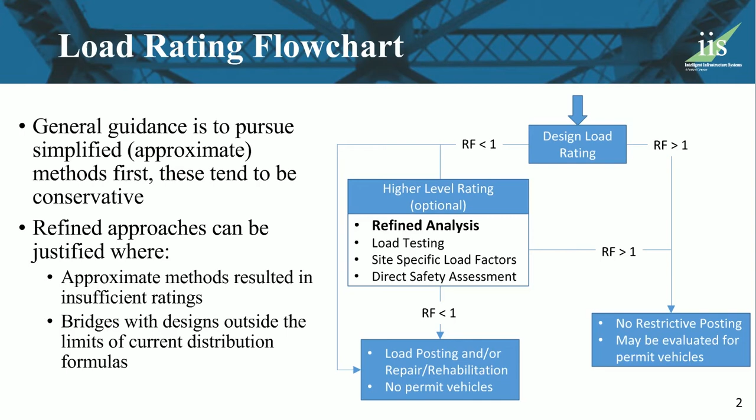So I wanted to get into the differences between an approximate and a refined analysis. So in each approach, your rating factor equation is the same: capacity minus dead load divided by live load, where the capacity minus dead load, you can kind of think of it as a reserve capacity, or what's left to resist live load. And in each method, approximate and refined, the capacity is the same. It's your code-based capacities for various limit states based on the material properties and the configuration.

In an approximate analysis, your dead load is really just engineering judgment. A decision has to be made about the self-weight of various components and which members it applies to. And your live load is the AASHTO distribution factor multiplied by the vehicle-induced loading. So in a refined analysis, those two demands are what's different.

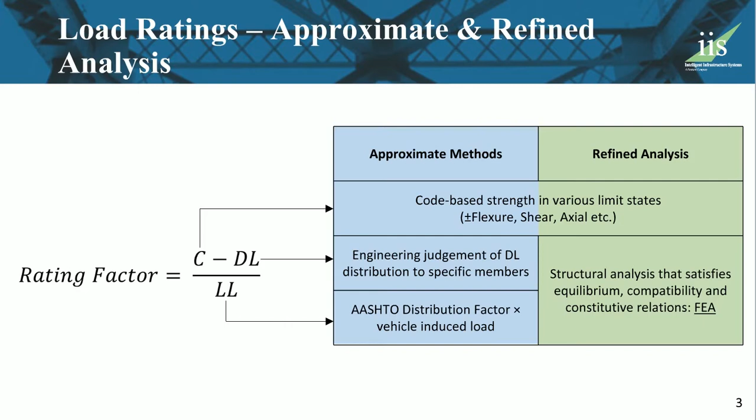In a refined analysis, the demands are based on a structural analysis that takes into account the actual configuration and the actual stiffness of the members. And there's a lot of different analysis approaches that qualify as a refined analysis, but for our purposes here, I'm really just going to be talking about finite element analyses, so FEA.

So let's talk about the workflow of a refined analysis. You have a structure, a bridge. You probably have an inspection report and hopefully a drawing set to go along with this bridge. And you need a refined analysis, so an analysis model, FEA model, and a set of results.

Then sit down in front of an FEA program and click through the user interface to build the model, to run the analyses, and to extract the results that you need. And in my experience, that process has been a little bit tedious, it can be error prone, and it's difficult to reproduce, but it doesn't have to be. And that's the automation I want to focus on here, is basically improving that workflow.

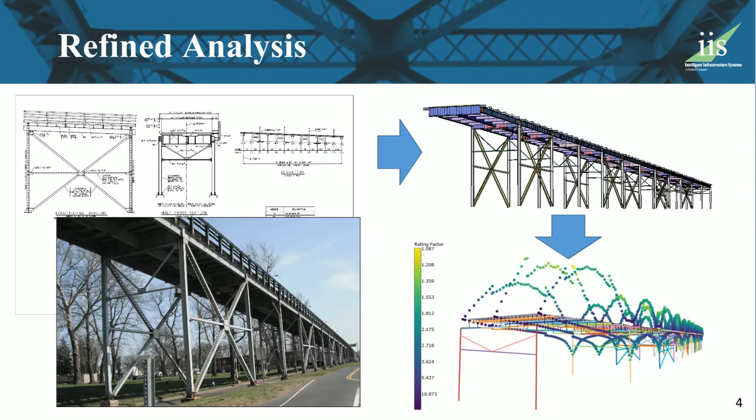So we could look at the steps of a refined analysis, and I see it as three kind of obvious steps. There's building the model, analyzing the dead load and live load cases, and then extracting member demands. And I'll get to the rating calculations later.

But if we want to look at these steps, when you build the model, it's really conceptualizing the structure, understanding the load paths, and then making a decision about how you're going to represent those elements in the model, deciding on element type, connectivity, mesh size, how you're going to represent a wearing surface or curbs or barriers, how you're going to apply vehicle load, that sort of thing.

Once those decisions are made, then you could interact with the finite element program to build the model. Then you submit the analysis, basically let the computer churn and pull out the results that you need. But in this process, what I really want to focus on here are the decisions.

So if I look at just what I'll call the engineering input, the decisions that need to be made, they're all up front. Your conceptualization of the structure, your decision about element types to use, mesh size, how to connect things, how to apply loading, they could all be made right at the beginning of the process. And that kind of condenses the engineering effort.

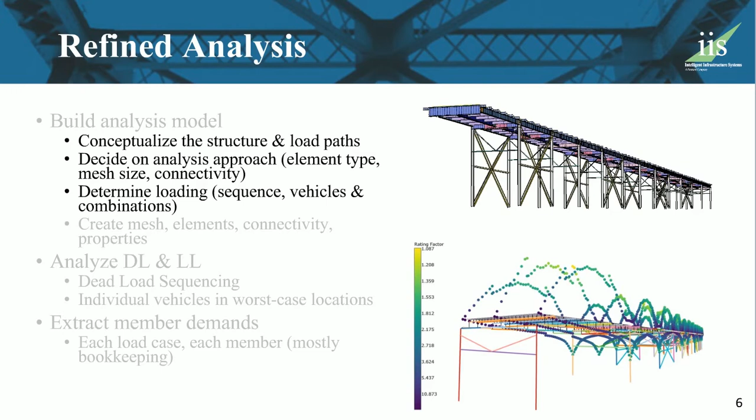So starting at the top, we basically have our known bridge documentation, and we make a couple of engineering judgment decisions that define our conceptualization of the structure. So then we have basically two categories of information. You have the stiffness and mass information that will go directly into the model, and you have your strength information that is still needed for the rating inputs. So something like your material, like a steel yield strength or an unbraced length, that sort of thing.

So all of those inputs then get packaged into one input file and passed into an automated process that, in theory, then just carries out your instructions. So it will build the model, analyze the model, extract results, hand you an output file that's a set of demands. It could even compute ratings internally and spit out your load ratings. So this is kind of the big picture view for what an automation routine could be.

But in order to improve on the normal workflow, it doesn't have to be this complex or this comprehensive. Even a small part of this process could be automated, and anything that kind of removes clicking through an interface and replaces that process of interacting with the GUI with a documented and traceable and repeatable procedure is definitely going to be beneficial. So the goal here is really to minimize that clicking through an interface.

And software companies, they know this. They're aware of this approach, and they're really making it easier for their users to do this kind of thing. Whether they call it an API or a macro, there's almost always tools available to give you access to the FEA program's commands without directly needing to manipulate the user interface.

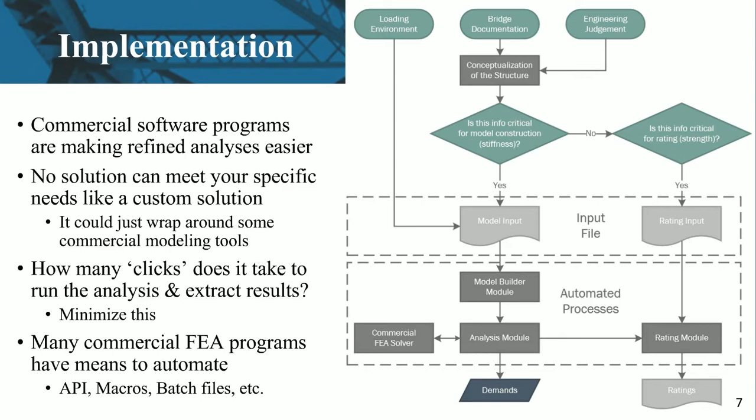So what I want to talk about today is my implementation of an automation approach. And the automated process I show on the flowchart there, I group into three chunks. The first is building the model. FEA programs in general are getting very good at helping you to build a model. They either come with predefined templates or a guided interface or a modeling wizard. There's tools with these programs to make it easy to build a model. So I'm not really going to focus there.

And then the green box where I talk about ratings, the load rating calculations that use your model results, they need to happen whether or not your process is automated. So there's not a huge challenge in automating the actual rating calculations. Where I want to focus on today is automating the analysis and the results extraction. In my experience, that's where I've seen the most problems and the most time spent manipulating the GUI, the user interface of these programs.

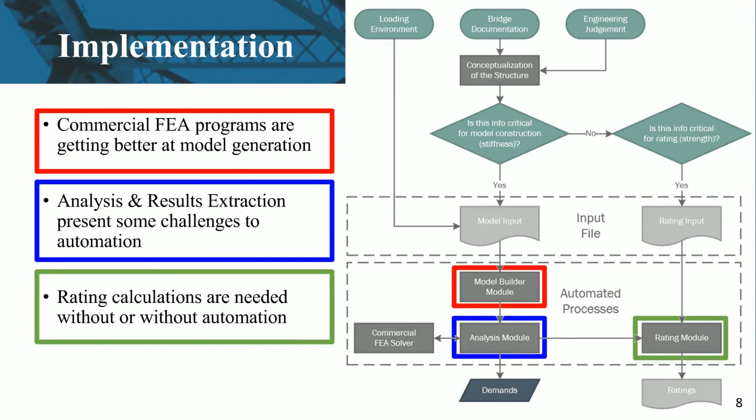So the first thing I'm going to touch upon here is composite member demands. And I think this is a pretty common problem. As soon as a model is refined to the point where you now have multiple elements representing a single component, it becomes more difficult to interpret your results.

So if you want a composite girder moment out of a model that modeled that girder with a beam element and then shell elements representing your deck, you really need to consider the moment contribution of the axial force couple between the two, the contribution from the beam element representing the girder, and the contribution from the shell elements representing the deck. And that process is tedious, and to try to do that basically by hand using outputs from each element is time-consuming, and it's difficult, but it really lends itself to automation because it's repeatable.

So once a routine has been developed to compute this net section moment, you could repeat it for each load case for each location of interest. And that is a huge improvement on efficiency.

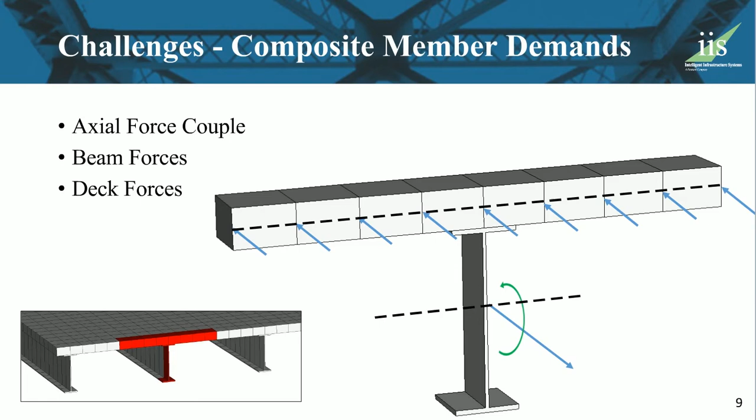So there is a workaround for this specific problem, but it requires a couple of assumptions. If you can assume that the net axial force in this cross-section is 0, and you're okay neglecting the deck element contributions, you could use the girder beam element axial force directly multiplied by the distance between the centroids to estimate your moment. But again, it requires a handful of assumptions, and the engineer performing the load rating really needs to be okay with those assumptions in order to use that approach.

The next challenge I want to talk about is a choice of a live load solver. So I think there's really two obvious choices for running your live loads, either a quasi-static approach or an influence surface approach. And the quasi-static, you can think of it basically like moving the truck or the vehicle along the bridge in predetermined steps with the goal of putting the vehicle everywhere it could possibly be on the bridge.

Once you have each of those individual locations analyzed, you could take the envelope of results, and within that envelope, you'll find the worst case for any location on the bridge. So depending on the size of the structure, this could be a really long analysis time. The alternative here is an influence surface approach, where you choose an output quantity to minimize or maximize, and then solve for the vehicle location that minimizes or maximizes that specific output quantity.

So the drawback here is you really need to know ahead of time what your governing location is going to be, or you need to select a lot of potential locations, and again, the number of analysis cases can get very high. But an additional complication here is that when your output quantity that you're choosing to minimize or maximize is something like a composite moment, an FEA program may or may not be able to select a compound output, something that's a function of multiple elements, as the quantity to maximize. So again, either of these approaches really requires some thought, and it's up to the engineer to decide which to use.

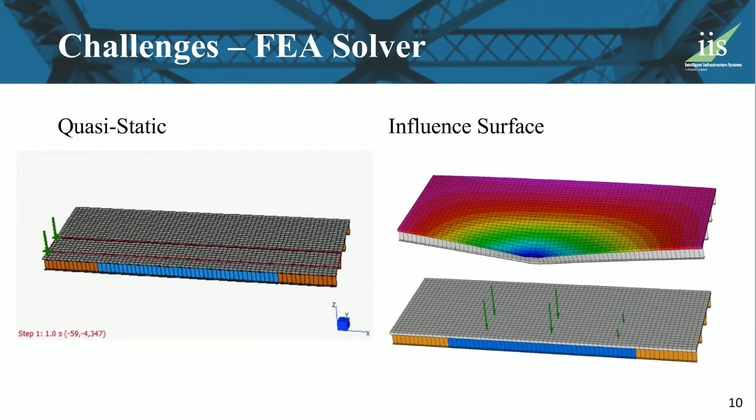And the last challenge I want to talk about with analysis here is how to handle construction sequencing. So for a composite multi-girder bridge, the same model, you really want to represent your non-composite dead load, your long-term composite dead load, and the short-term composite live load. And that can be sort of difficult because it's essentially a different stiffness that needs to be represented in each of those cases. So most commercial FEA programs allow you to modify stiffness as a function of some other parameter, either a direct modification or maybe a function of time or temperature.

But essentially what you can do is modify your deck stiffness. So in a non-composite case, the deck has no stiffness, and in a long-term composite case, it has a portion of the stiffness. And in the short-term composite or the composite live load case, it has its full stiffness. And what I found is that in addition to that, it's really helpful to represent the dead loads as loads rather than through element densities.

So take, for example, a wearing surface. The self-weight or the dead load of your wearing surface requires a different load factor. So you really need to represent that in its own load case. And I think having your dead loads applied as loads rather than as element densities in multiple load cases really gives you a finer resolution, a finer control over your dead loads.

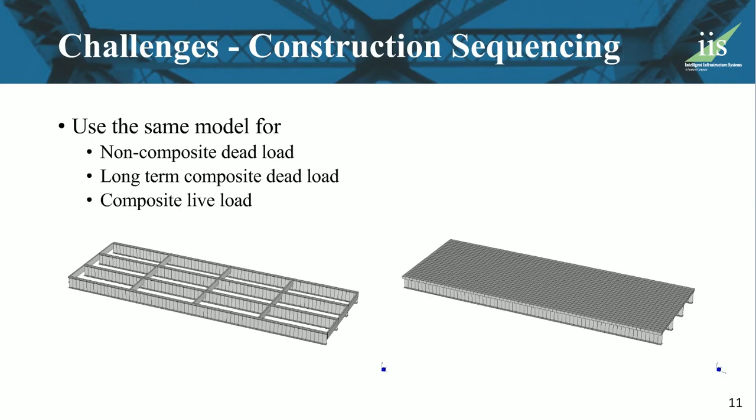So now that we've gone through a couple of the challenges, what I want to get into are really the benefits. And I think I already mentioned that the benefits of a refined analysis are a more accurate representation of your structure and typically a lower live load. But what I really wanted to focus on here are the benefits of automating the process.

So I need to say the benefits of automation are a little bit dependent on the flexibility of the automation routine. So all of the model images on this slide and all of the model images you see in this presentation were all created with the same automated routine to build a multi-girder model. And there's a bit of a trade-off here between the complexity of the routine and how easy it is to develop. But the more generalized it could be, the more applicable it's going to be. If your program is more general, it'll apply to a lot more structures.

So with that said, I think the big benefits of the automation routine are efficiency, transparency, and repeatability. And I want to talk about these a little bit more. First, efficiency. Being able to condense the engineering effort right up front and not have to spend time clicking through an interface to build a model. It's just a better use of the engineer's time.

When I say transparency, what I'm really meaning there is the process is traceable. So take, for example, if two engineers are each performing a refined load rating using a manual process where they each sit down and build a model using a GUI, they're going to get different results. And when they try to compare, it's not going to be obvious how those two analyses are different. They're going to have to do some digging into element choices, how each member was represented, how they were connected, how dead load and live load were represented. It's going to be a significant effort.

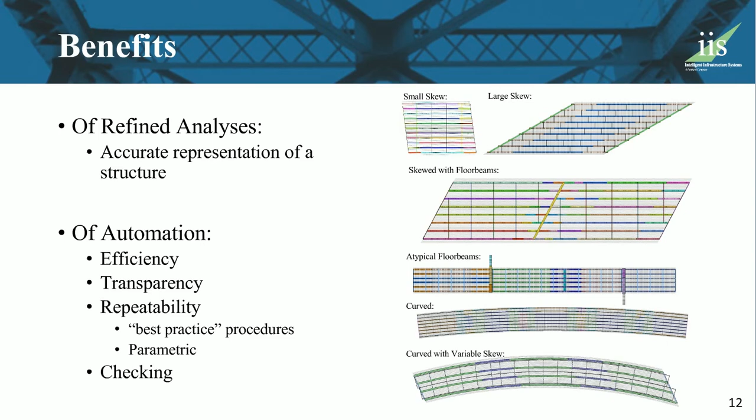So I think the best way to really appreciate the benefits of this automation routine is with a quick example. Up until this point, I've been speaking in generalities, advocating for more refined analysis and more automation in refined analyses. From here forward, I'm going to talk about the automated routine that I developed to improve the workflow, with a simple example. In the next 10, 15 minutes, I want to go through the first illustrative example from MBE. This is a really simple bridge that has a single line girder rating in MBE. So I want to do a refined analysis of this bridge, and then I can compare.

And in the process, we'll be able to see the workflow of using an automated refined routine. So this bridge is a simple structure. It's 4 composite girders and a concrete deck. So I think step 1 is conceptualizing the structure. It's a fairly easy structure to understand, and that kind of makes it easier on us now. But it also saves time in this quick demo.

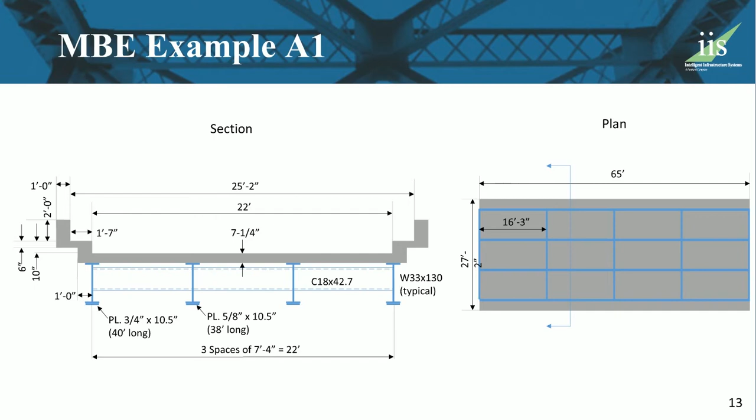So I'm going to choose to model the deck with shell elements, the girders and diaphragms with beam elements, and I'm going to choose to neglect the curbs and barriers, basically treat those as non-structural mass. So the first step in defining your set of inputs for an automated routine is locating the origin. And now all of my coordinate inputs are going to be based on this location.

So you see the location I selected here, where the x-axis is along the length of the bridge, y-axis is across the width, and z is vertical. And my origin is in the center of the deck, so the z-coordinate of my deck shells will be 0. And the y-coordinate of 0 represents the center line of the bridge. And that allows me to check symmetry on the girder inputs, basically by saying I have the same plus or minus y coordinate.

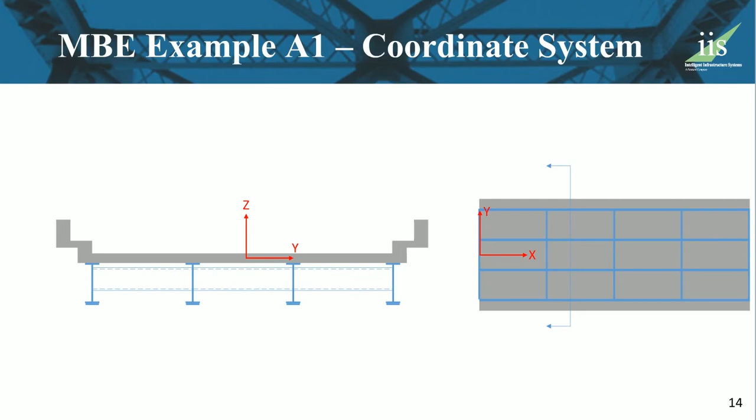So the first thing I'm going to do here is start defining components. And in the next handful of slides, I'm going to be defining components, and there's going to be a yellow box on the bottom. And I know the text is small in there. The purpose of that box is really to show the amount of input that I need in order to define this component. I don't intend for you to read and understand everything in the box.

So take, for example, the deck. I've grouped my deck into 3 different deck regions, 1 in the middle and 1 under either barrier. And the reason for that is just to assign non-structural mass to the deck regions under the barriers. So that's the only difference between my 3 different deck regions. So you see here, I'm basically just locating the 3 different regions, assigning a thickness and non-structural mass inputs. And then the automation routine will take care of meshing these with shell elements, connecting them to one another.

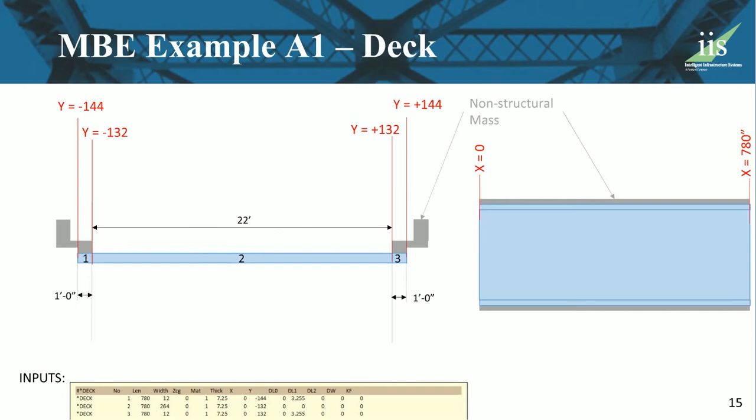The next component I want to define are girders. So there's 4 girders. Each one has a bottom cover plate. So my input then, I'm treating them as 12 separate girders. So this input syntax is entirely something I made up. And it works for me because it's general.

I think you could very easily define the inputs here in a more condensed format, but you do that at the cost of some generality. So I found this format to be really useful to define a wide variety of structures. And I think defining 12 lines of input to define these 4 girders is not that bad. So that's the method I chose here.

So here I define my girder components, basically the start and stop locations, the material properties. I locate it vertically by defining a haunch. I define the connection to the deck with a connection property. I'm defining it here as composite, so I'll use a rigid link to connect them. And then I also provide some information needed for the ratings. So unbraced length, whether or not the web has transverse stiffeners, whether or not the web is coped, that sort of thing.

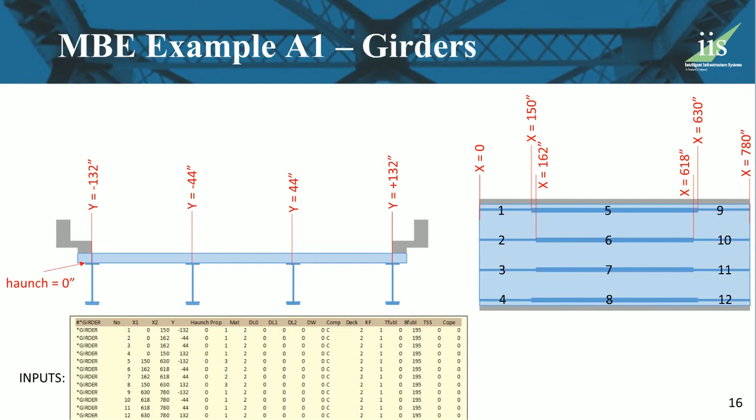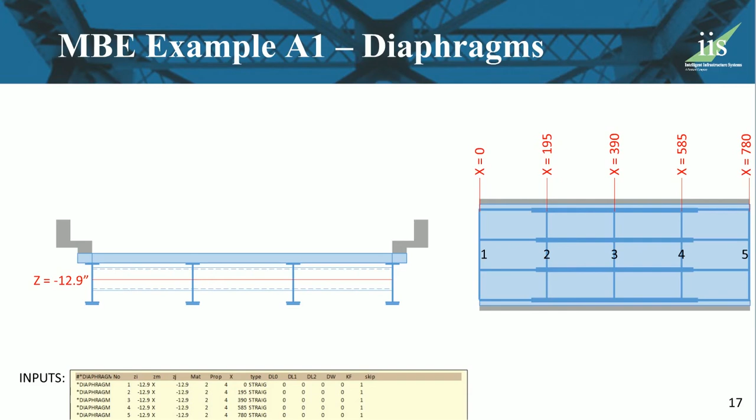So onto the diaphragms, again, the same idea as the girders. I'm identifying components, I'm locating them, I'm giving them a cross-section property designation, and the automation routine will take care of putting these elements in the model and connecting them to the rest of the components.

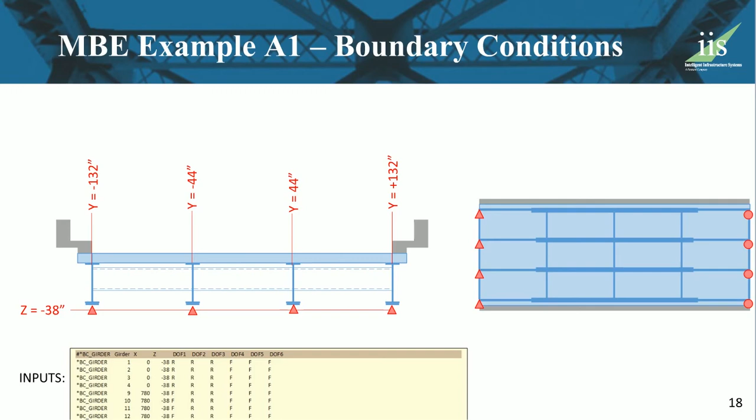Next is boundary conditions. So here I'm putting a pin and a roller on the end of each girder and designating which degrees of freedom I want to restrain, and the automation routine will take care of actually figuring out which node is there and assigning it to the node.

Material properties and cross-section properties, this one is pretty straightforward. It's really just a matter of defining the linear elastic properties of the concrete and the steel. And again, I'm adding in the strength information. That'll get used for the rating calculations, not necessarily in the model.

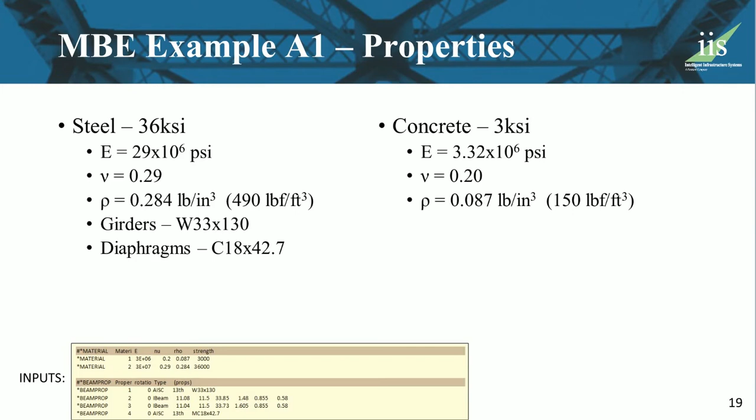And then finally, loading. So for this example, I'm going to choose to run a quasi-static live load. So I'm locating the lanes where I want to put the vehicles. And according to MBE, I want to keep a 2-foot spacing between the edge of a curb and the vehicle point loads, and I want to keep a 4-foot spacing between passing vehicles in adjacent lanes. So essentially I get 7 feet left to place my vehicles.

And I'm going to run just one vehicle here, the HL93 Tandem. And again, that's just in the interest of time. And the other thing I'm defining here is the analysis step. So how far do I want to move the vehicle in each increment? And that's my decision. I could choose to take very large steps and the analysis will go pretty quickly. I could take pretty small steps and the analysis will take quite a long time.

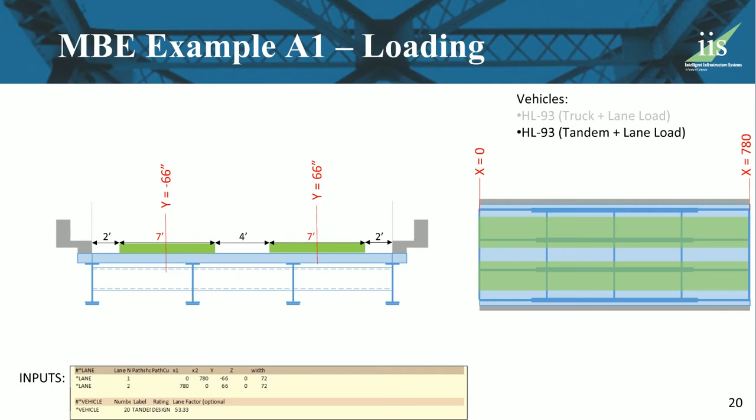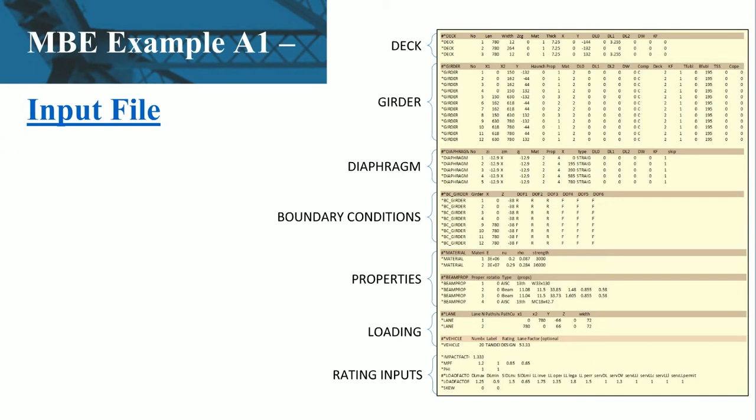But the difference is going to be the resolution on my load envelope. And in this example, I'm going to go in relatively large steps just so the analysis runs fairly quickly. And that's it. That's all the inputs I need to define the analysis of this structure. So there's a few new lines at the end. These are inputs needed for rating, so like a load factor, impact factor, multiple presence factor, phi factor, that kind of thing. But that's it. This is the entire input file.

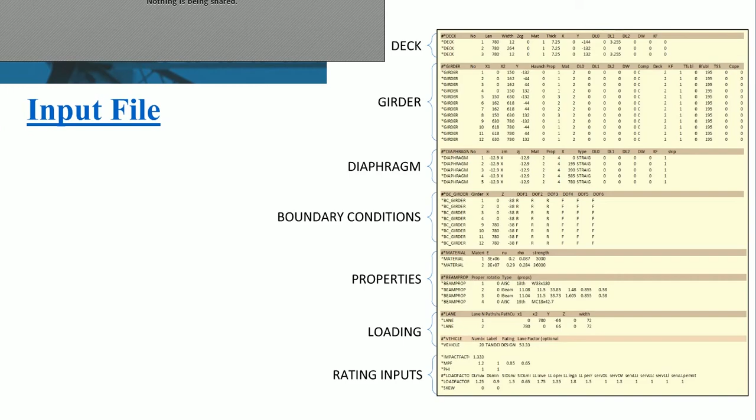So at this point, I want to basically show how this input file then gets used in an automation routine. So Lubin, if you could jump over to the screen recording. So what I'm going to show here is a recording of my screen that I did. This was a week or two ago. And you should all be seeing Lubin's screen now. He's going to play the presentation.

But what we're going to see is on the left, it'll be a Windows Explorer menu. And on the right will be a command prompt. So the automation routine I developed, it's written in Python, and it's what's called a CLI, or a command line interface. And that Python code manipulates and accesses the features of the commercial FEA program called Strand7. Explorer on the left, and my automation routine, the command line on the right. I refer to it as BridgeMiser. That's just the name I gave to my automation routine.

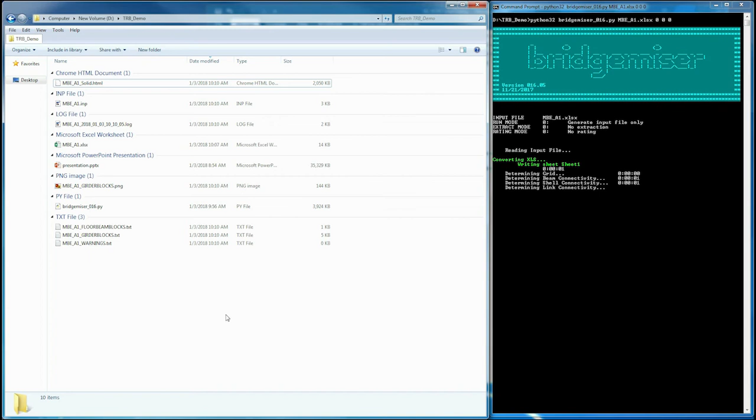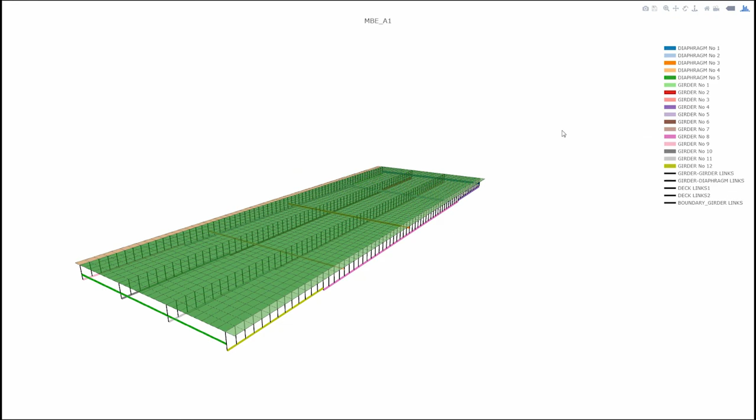And what I'm going to do is basically pass in the Excel file that we just developed as my input file. It's my set of instructions. And what the code has just done is taken those instructions and built the analysis model. So initially, I don't want to do the entire rating. I just want to build the model. So that's what we're looking at here. The model is built. All my components are now defined as elements. The little black lines are links connecting the girders to the deck. And I basically can confirm that the model built exactly what I wanted it to do.

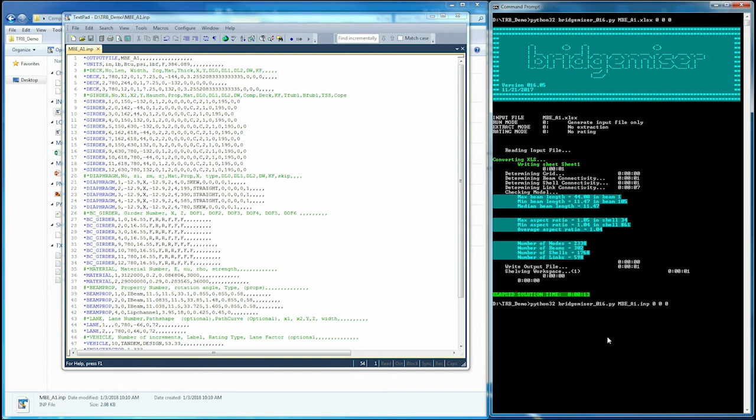So if you allow me a quick tangent, I'm going to go into my input file, the text version this time, not the Excel version, and make 2 quick changes. So like I said before, this process is now parametric. So the changes I made are I added a skew to the bridge, and I changed the way I want to represent the girders. So I made 2 quick changes, and I resubmitted that input file into the BridgeMiser routine. And as a result, it will then generate a new model. So the new model is going to represent girders with beam elements for the flanges and shell elements for the web. You see it did some internal checks there and gave me some information about my model.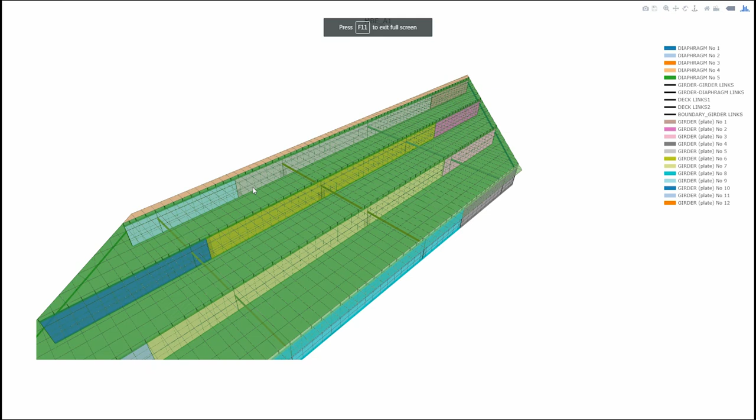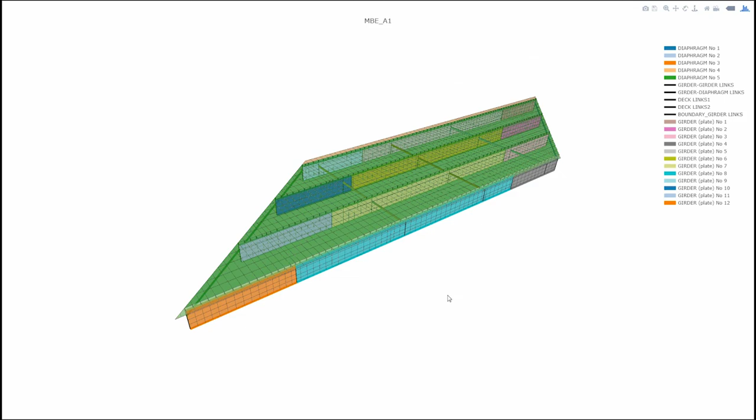But now I'm going to open up the rendering again, and I can see the new model is now skewed. So the mesh is totally different, elements are totally different, and the connectivity is totally different, but it's the same structure. All I did was add a skew and change the way I'm representing the girders. So that's what I mean when the model is now parametric. So in order to build this model by hand, it's a significant undertaking. But once you have the input developed, modifying it to make a slightly different analysis is really not a problem at all.

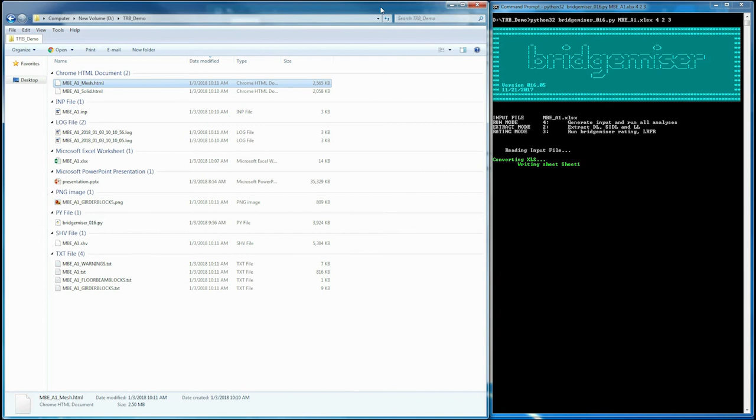So now I'm going to go back to my original model, the one without the skew, and I'm going to submit the entire analysis. So I want to build the model, I want to run my dead loads, I want to run my live loads, extract results, and compute ratings. And as I mentioned before, I was able to include some self-checking into the process. And one self-check procedure that I always do is running a modal analysis.

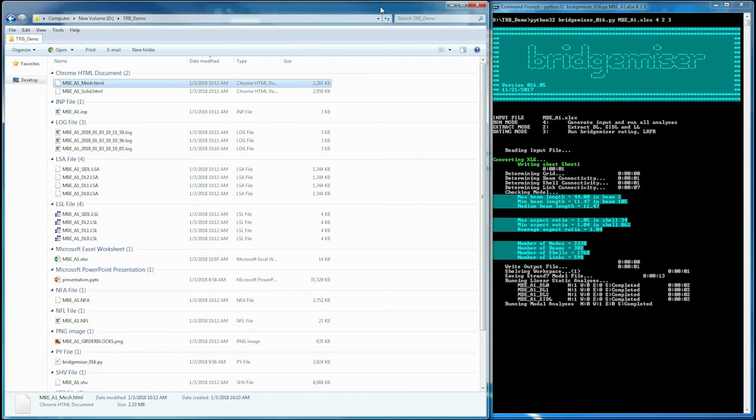So you see here on the right in the command line, as it steps through the process, it basically gives a printout of what it's currently doing. So after running the linear static analyses, it'll run a modal analysis, and then I'll open up that same viewer window again to allow me to view my modal analysis. It'll show me my mode shapes, and I can basically confirm that there's no errors in connectivity, that my properties are reasonable, and the mode shapes are reasonable.

So in the background now, the automation routine is continuing to run. It's running the live loads. It's going to start extracting results. But while that's running, we're going to look at the mode shapes here.

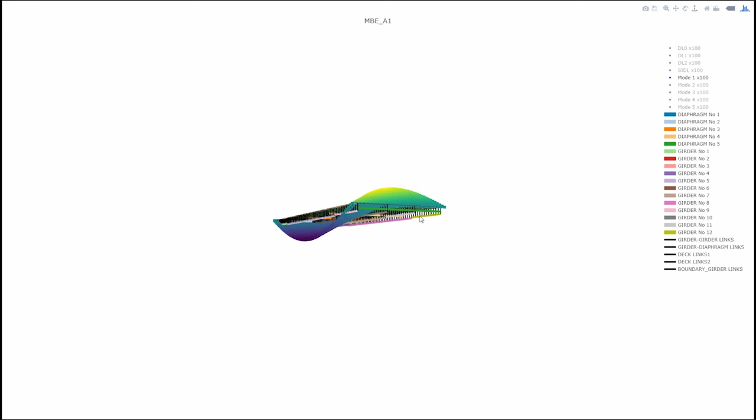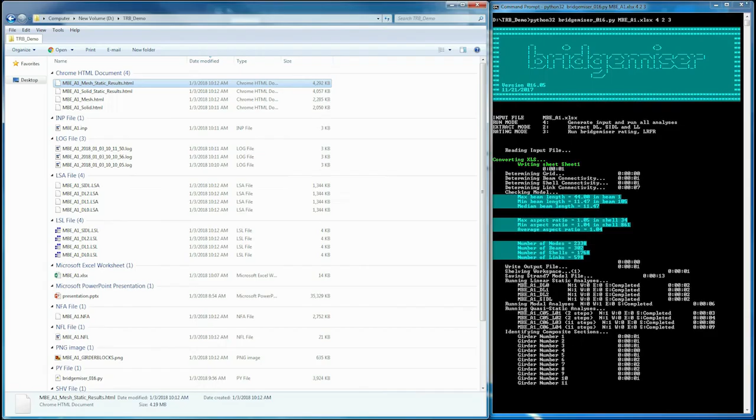So I can turn on my first mode, and what I'm visualizing here is the shape of the deck, and that's a torsional mode that to me looks reasonable for this type of a structure. It's showing me that I don't have any errors in connectivity in the model. And here's my second mode, your first bending mode, and again, that looks reasonable. So I was able to quickly incorporate these self-checks.

So the analysis routine has continued in the background. We see the live load cases have finished. There were 4 of them, 2 for the uniform lane load and 2 for the actual tandem vehicle. The next step was identifying composite sections, so which deck shell elements are within the effective flange width of each girder beam element. Once those are defined, then I can use all of those elements to extract composite demands.

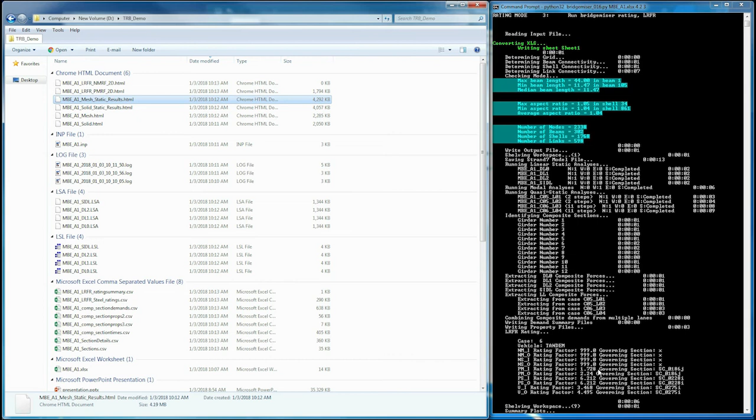I output files that summarize demands and capacity calcs, and I could produce a load rating. So there we're seeing a short summary of the load rating, and the final step is I'm producing another plot that summarizes the rating and the conclusions. So the plot I'm bringing up now is basically a version of a summary table, but instead of just showing one output, I'm showing all output locations.

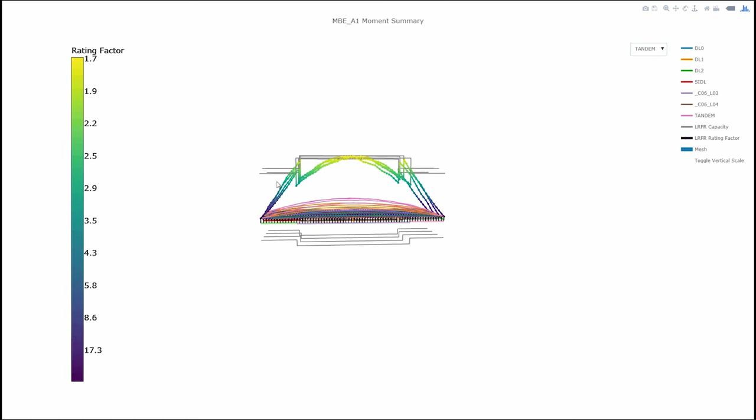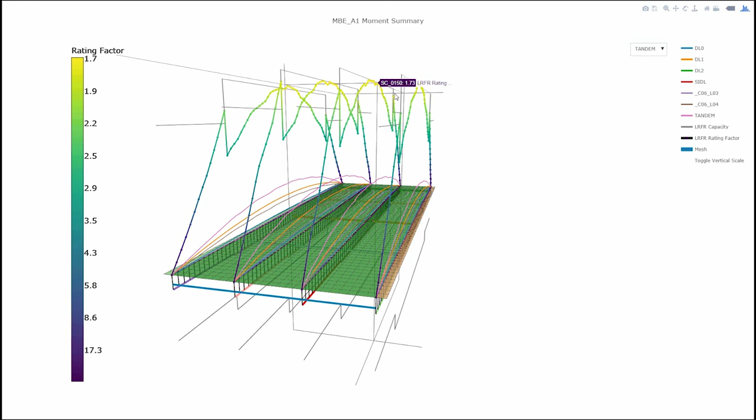So I'm kind of mixing vertical scales here. The colored plot is a rating factor. So we can see our moment is governed by rating at midspan, which we knew. But because of the cover plate, we can see the step there in the capacity and in the rating factor. So like I said, I'm mixing vertical scales. The gray line is a capacity and the other colored lines are demands. And then the contoured line is my rating factor.

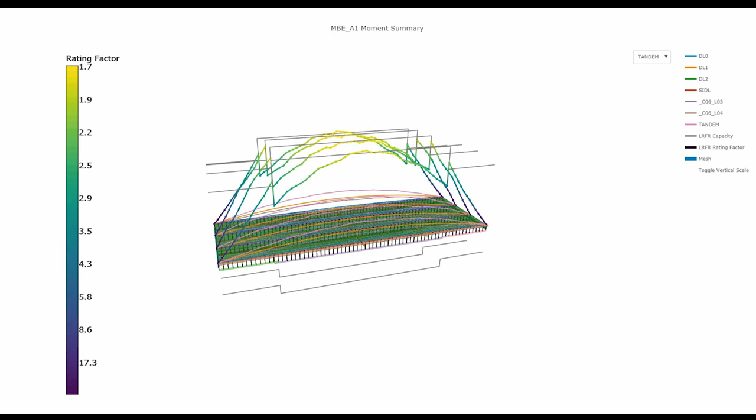But through this type of integrated display of demands, capacities, and rating factor, I think you really get a more holistic view of the structure, how one region compares to another. So I'll pick up here with the conclusions from that demo.

And what we see if we look at the refined analysis conclusions compared to the approximate method or the single line girder results from AASHTO MBE, there's a different dead load. And that's just a result of a different assumption about dead load in the 2 analysis approaches. We see more dead load in the exterior girder in the refined analysis because in the single line approach, it was kind of smeared through all the girders.

We see a lower live load in both girders, and that's the result of the refined analysis approach. It's a more accurate representation of the live load than you get from the distribution factors in AASHTO. And as a result, you see better load ratings in both girders. But the real takeaway here is that we were able to do that refined analysis in 20 minutes.

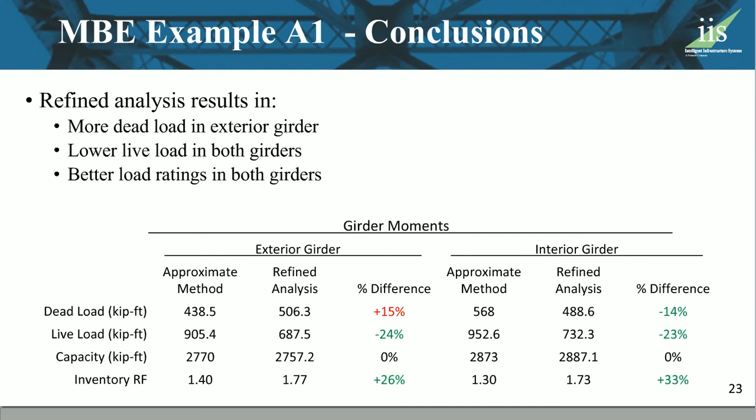I think building that input file in Excel is not that big of a process. It's not that much longer than needed for a single line input, especially when you consider that you would need to do one for the interior girders and one for the exterior girders. So now that we have our refined analysis, what do we do with it?

So at the end of the description of refined analysis in MBE, there's a line that says that a refined analysis should be used to produce distribution factors, which then makes additional load ratings easier, but it doesn't really give you any description as how to do that. And I've seen 2 approaches.

So on the left, I'm showing an approach where your distribution factor is really computed using the full cross-section result. So in each case, you want to define a distribution factor as the individual girder live load divided by the entire live load. And the problem here, or the question here, is really how to compute that entire live load. And one option is to take a cross-section across the entire bridge and compute the resultant in the same way you did for a single girder, basically using the element results to find a composite moment.

But the problem here is that as soon as your bridge becomes skewed, the choice of the cross-section to take becomes a little bit more difficult. So I don't really like this approach. On the right, I'm showing a separate approach where you could essentially isolate a single girder from your model and run that as a line girder. So put your vehicle on that single girder. So if your bridge is simply supported as it was here, you don't even need a model for it.

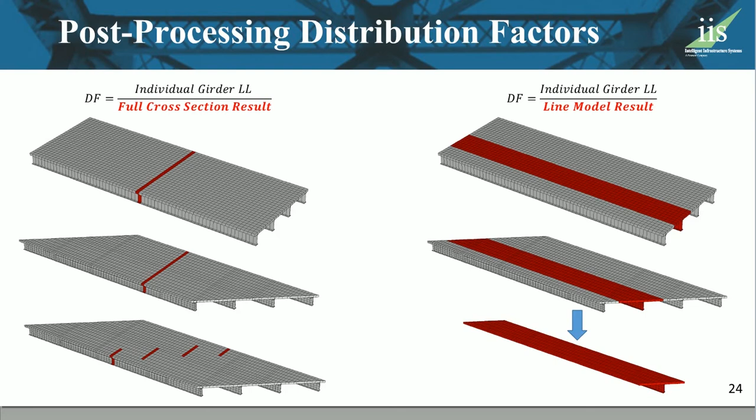It's determinate. And you can determine your total vehicle, or the denominator for this distribution factor, using just that single girder example, or single girder analysis. So this is what I have added into the automation routine. And when I run a compute distribution factors for that example, this is what I see.

It's essentially showing lower distribution factors for moment and shear in my interior girder. There's in the neighborhood of a 10% benefit. Exterior girders is less consistent, but interior girders, we see the benefit. So the one thing I want to mention here is that these distribution factors are not properties of the bridge. These are properties of the analysis.

All of the analysis decisions that were made are kind of baked into these factors. So things like how the girders are represented, how they're connected to the deck, where the vehicles were placed in the analysis. If you move the vehicles transversely or move them closer together or farther apart, that'll affect these factors. And they're also a function of the vehicle.

So I ran this bridge for a suite of 20 different legal design vehicles. And what we see is a range in distribution factors. So for the two-lane interior girder shear distribution factor, it varies from 0.54 to 0.72 depending on your vehicle. That's a pretty substantial range. And for the moment distribution factor, you see slightly less range, 0.52 to 0.57.

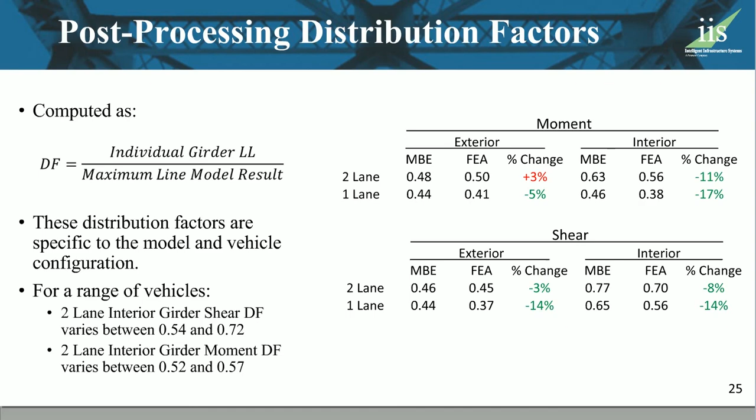But still, my point here is that these factors are analysis output. They're not a property of the bridge, and they are totally dependent on the analysis. So I want to get to one last topic here, and this is the issue of checking. So when you automate the process, the purpose is not at all to remove the engineer. It's really to make better use of their time.

So the responsibility on the person doing the analysis is still there to do their self-checking. But those self-checking tasks could be made easier by the automation routine. Things like reporting element quality, like aspect ratio of your shell elements, reporting your modal analysis results, being able to really quickly run a mesh sensitivity. I didn't do it there, but one of the inputs into this process was mesh size. I could have very quickly changed the mesh size and rerun the entire analysis and determined if my results are sensitive to the mesh.

In the analysis, I could have the routine sum my dead loads and be able to compare to a separate dead load check to make sure I'm accounting for all the components. I can have it sum the live loads to make sure that my vehicle definitions are correct. The process has become traceable to the point where I can output all of the intermediate results. And that's what I want to talk about in the load ratings.

So when I'm automating a load rating calculation, what I want to see basically is being able to trace the process from input to output. So I didn't open all the files there, but I'm printing out quite a few different text files that just present results to allow me to go back and check the entire process. What I'm saying here is that I'm going to do the same checks no matter how the rating was performed, but the automation can help it.

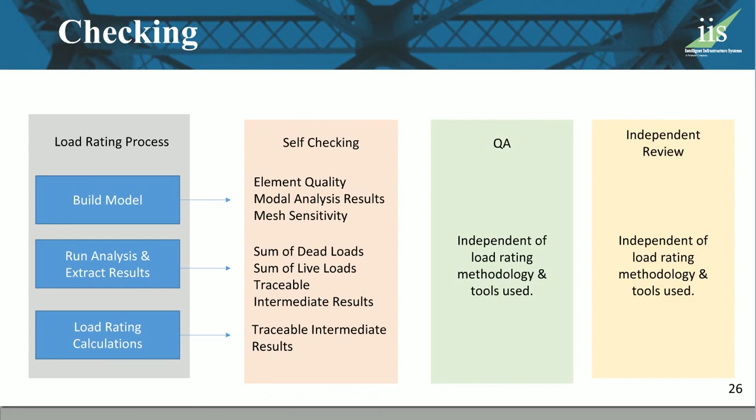So to sum up, I think the barriers to performing refined ratings are really diminishing, and it's becoming easier and easier to automate either a part of the refined rating process or the entire process. And the inputs for a multi-girder bridge don't have to be that much more difficult than the inputs required for most single-line girder programs. So yeah, the bridges I'm showing here, they're substantially more complex and the inputs are longer, but they're still much, much easier than doing a refined analysis through a manual approach of building these models by clicking through a user interface. And the engineer still retains all of the control on all of the decisions. So it's really condensing the engineering effort rather than distributing it through the process of clicking through a user interface.

It's all put at the beginning into an input file, which is then run by the program, and most of the time is spent in computer time as opposed to man hours. So once you have this output, the same checks are still required. This tool doesn't get you around any engineering judgment or any understanding of the process. That's still all required, but it really enables a much better use of the engineer's time.

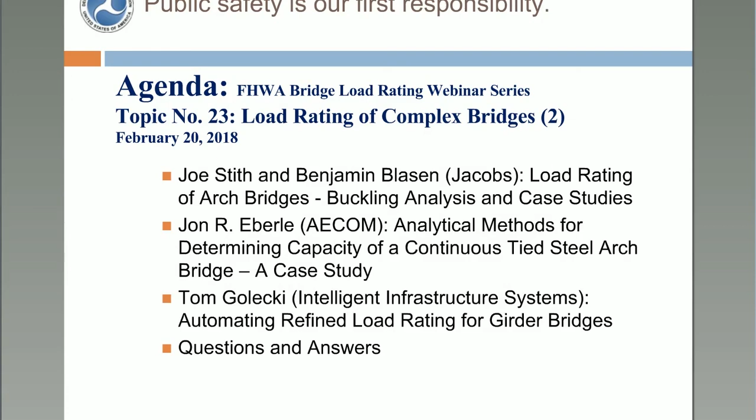Mr. Patel asked which software is being used for preparing the model? I kind of spoke in generalities because I don't want to be partial to any one FEA program or another, but I've defined my model just as components. And then the automation routine takes care of breaking those components into nodes and elements. So once I have the nodes, the elements and the connectivity, I could basically put that into any FEA program I want. That demo I showed uses a program called Strand7, but it's basically just

restructuring your text input to put it into a different program. I could easily have put it into SAP or ANSYS. It's just a matter of knowing the syntax of the inputs for those programs. So to answer your question, the model is built outside of an FEA program. But it's certainly not the only way to do it. I didn't focus on building the model because the commercially available FEA programs have a lot of tools to build a model. I'm not saying you need to build it on your own, just that there are ways to improve on the standard process.

Elizabeth asks, is BridgeMiser considered an input tool, and is it compatible with all FE programs? It's certainly not compatible with all FE programs, no. I'm currently working on expanding functionality to other programs because I know some state DOTs specify which programs are approved and which aren't. Right now it works with Strand7, and I'm working on incorporating SAP. You can think of it like an input tool. It develops the input, but it also interacts with the solver by requesting analyses, pulling out results and post-processing those results as well.

David Warner asks, any experience with megaload, superload movements? Yes. This process could totally be used for a one-off style analysis. If the input is already developed for a bridge, quickly analyzing an additional vehicle is basically just the effort of defining the vehicle. So we've used this process for permit analyses in the past.

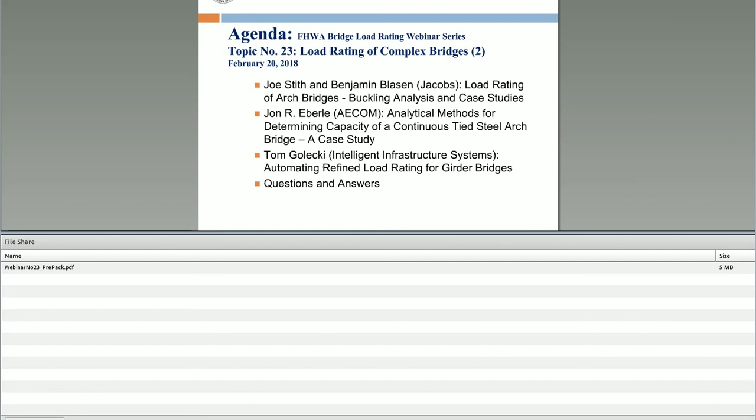David asked about experience or future use. Where are you going to go with this in the future, any other thoughts on how to use the automation? I see it as something that could be deployed in a big picture sense, like having a library of input files for multiple bridges along a corridor, or owned by a turnpike or a DOT. Doing it in a one-off situation is totally doable, but it seems like it has a bigger implication.